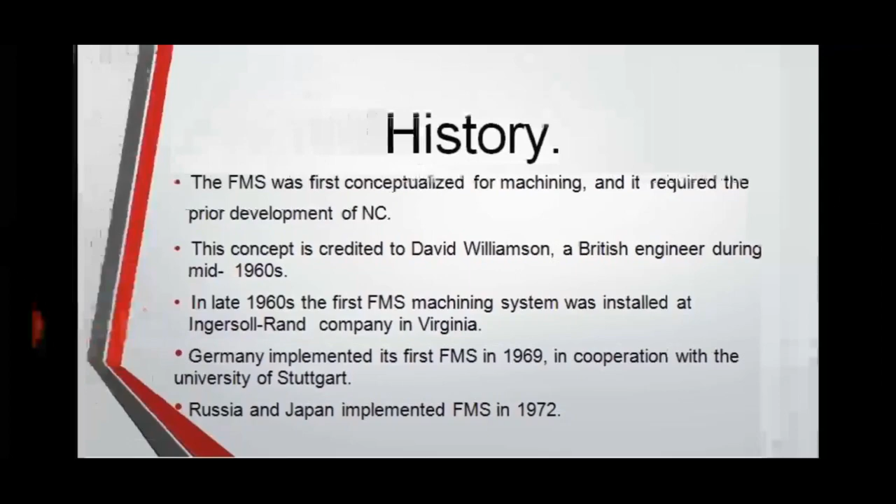So what is FMS? We know that in the current market there is change in the products frequently. The customer requirements are changing day by day, and also the designs which are made have to be changed frequently according to the convenience of the customers. So the products that are manufactured have to be changed frequently in order to compete in the current market.

So in order to change the design and also to change the manufacturing, we implemented this FMS, that is flexible manufacturing system. So in this flexible manufacturing system, there is an opportunity to change the design frequently and also to change the manufacturing operations, so that within less time we can manufacture a number of products,

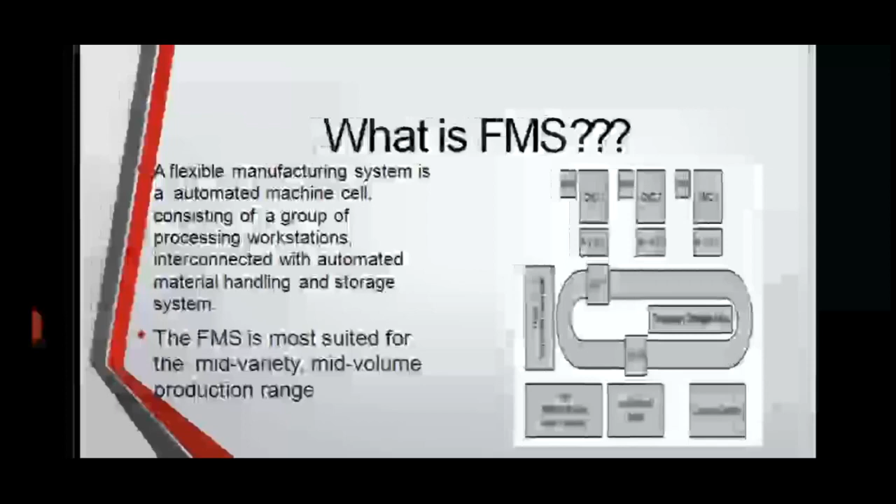So for this purpose, it is mostly suited in industries for producing medium volumes of products. So this is the reason why we are using this flexible manufacturing system. So why do you require this FMS?

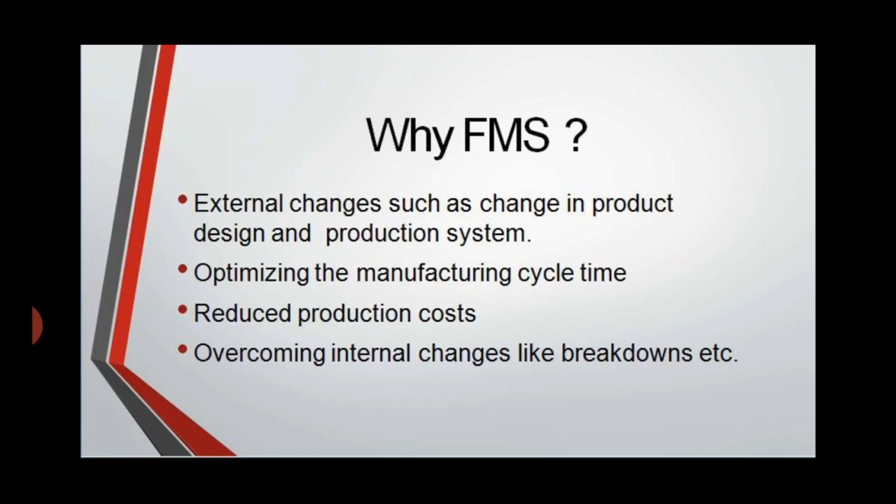The time delay will be very less because of fewer breakdowns in the machines. So this is the reason why we prefer this flexible manufacturing system. So how is this flexible manufacturing system going to make manufacturing industries more flexible? As you know, there are a number of capabilities in a manufacturing system.

So there must be these capabilities in the manufacturing system, because if the products need to be changed, then we are going to change the physical setup, stop the machine, and make n number of adjustments in the machines to make changes in the operations. So the ability to identify and distinguish among the different part styles processed by the system.

So in order to identify the different parts and part styles and to process them, the machines that are used must be flexible so that they can identify the different parts, and also in order to change the operation, to perform different operations and to change over the operations within less time, the machines must be more flexible,

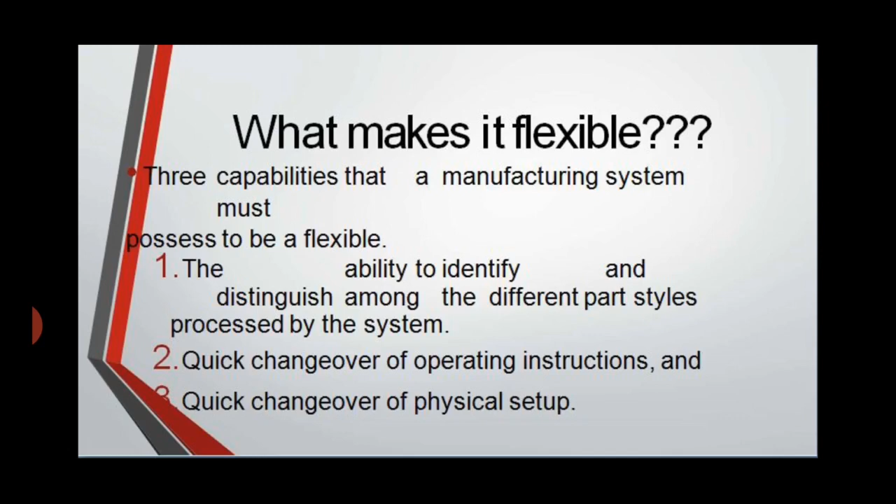So here, by using this flexible manufacturing system, we are able to do all these operations. We can change the physical setup within a short time, we can change the operations, and also we can change the designs, and also we can process a number of parts within less time. So it is more flexible to use in the industries.

So how is this FMS classified? These are the classifications of FMS. A flexible manufacturing system can be classified according to the number of machines in the system. If you take one system, it may consist of only a single CNC machine, or it may consist of n number of CNC machines, which we call workstations. That is, there may be either one workstation or n number of workstations, and depending upon that we classify these flexible manufacturing systems.

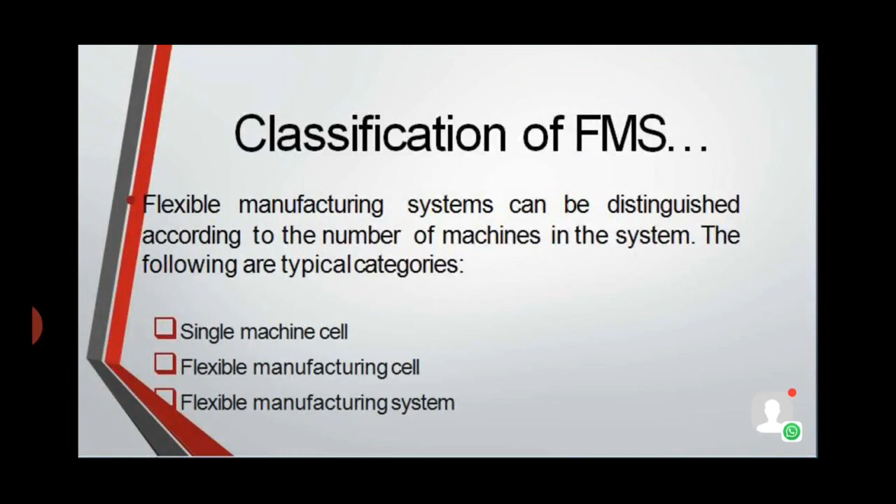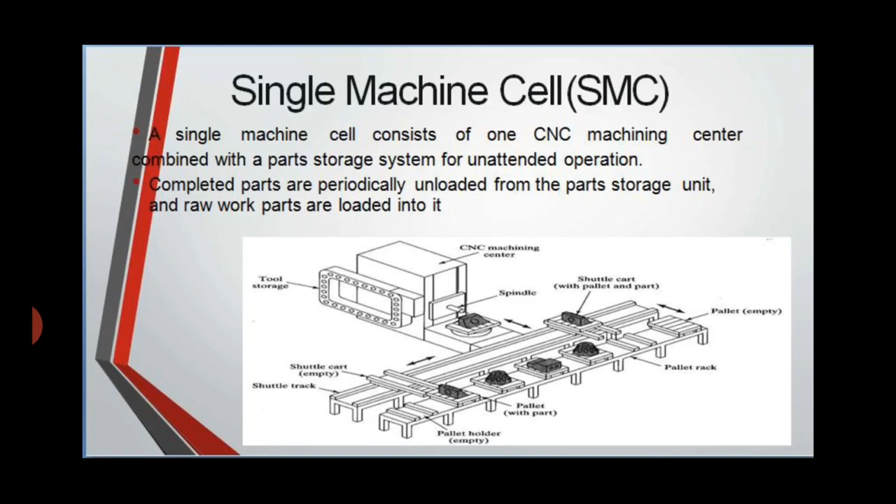So this single machine cell consists of only one machining center, and it is combined with a parts storage system for unattended operation. In this single machine cell, completed parts are periodically unloaded from the storage unit, and raw work parts are loaded onto it. Raw workpieces are fed and transferred to the machining center to perform the operations, and then they are transferred to the other cells. So depending upon the CNC machines used, we call it a single machine cell, where only a single machining center is used.

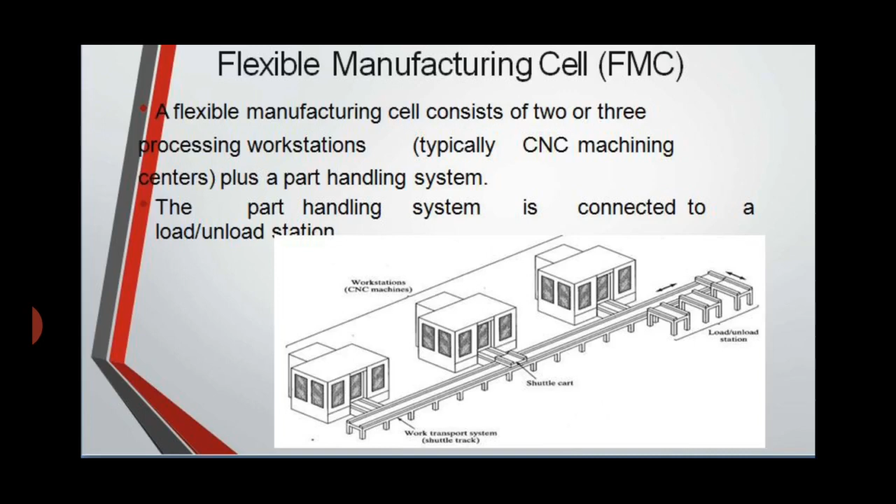And the final is the flexible manufacturing system. This flexible manufacturing system consists of 4 or more machining centers or workstations, which are connected mechanically by a common part handling system to perform the operations. There is only one common part handling system, which transfers the raw materials to the respective workstations, and these are electronically controlled by a distributed computer system.

This distributed computer system is where all the operations are controlled. If there are a number of workstations, for example 4 or more, then by using only one computer system, the distributed computer system, we can control all the operations being performed, and also control the automated material handling system in this particular manufacturing system.

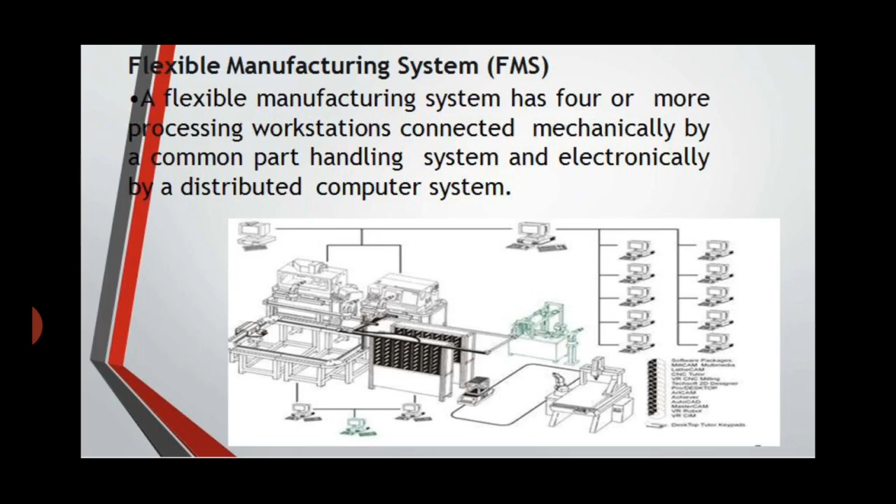The FMS has some basic components. First, workstations: in workstations we have a number of CNC machines, that is computer numerical control machines, which are used to perform machining operations on different part families. Depending upon the parts, we manufacture the components. It also consists of a storage system in order to transfer the raw materials and the finished products. And it also has a computer control system.

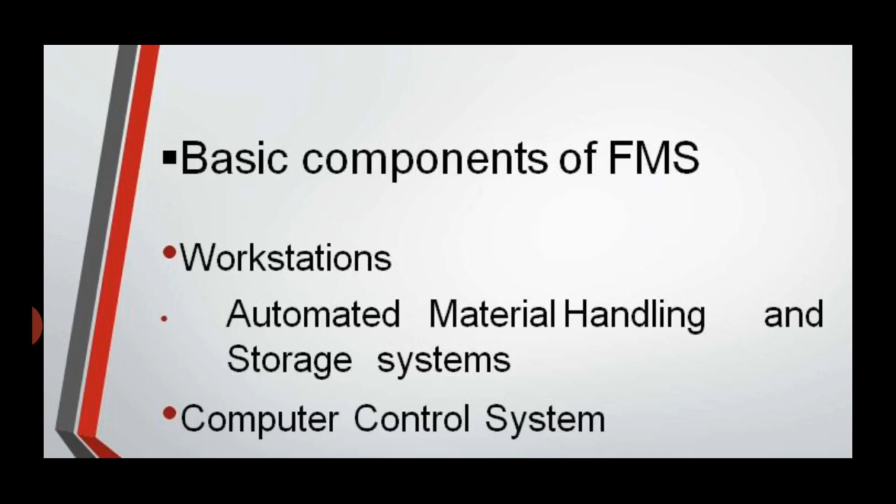So this is how the components of FMS are present in a flexible manufacturing system. When you come to the workstations, this particular workstation will be having a computer numerical control system, that is, in order to make machining operations, it has a number of CNC machines which work according to the part families,

and it contains a number of substations, that is loading and unloading stations, and it also consists of machining stations and a number of assembly workstations, where after the operation is performed, in order to assemble the products, you will have the assembly workstations, and also other processing stations like inspection, where after making the number of operations, we have to inspect in a particular workstation. So for that there are inspection stations where we perform the inspection on the finished parts.

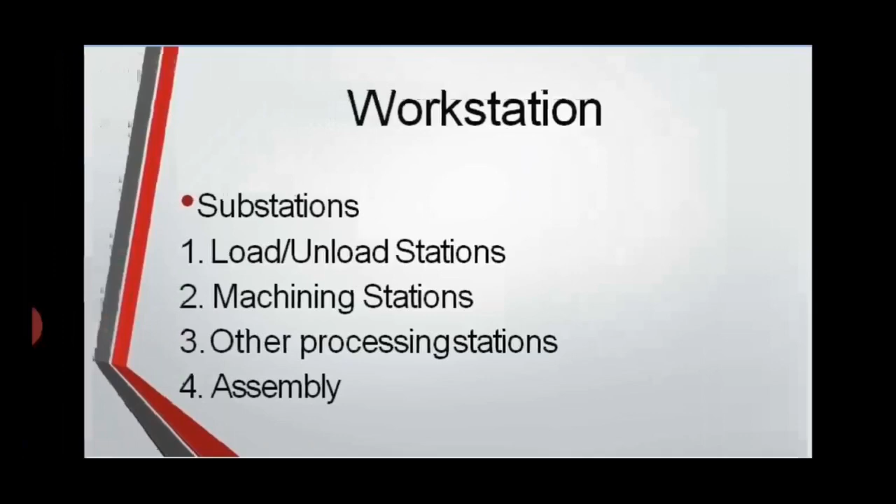So this is how the workstations carry out the work. It is going to make n number of operations here, whether it may be loading or unloading, or after loading it is going to make the machining operations, and after the respective machining operation is done, it is finally inspected, and then it is assembled here.

This particular unit is going to control the traffic, the material handling system, and also the monitoring of all the work parts being processed here. It is controlled with the help of this control system. So these are the components of FMS: first is workstations, and second is the computer control system. By this we are able to control and make a number of operations here.

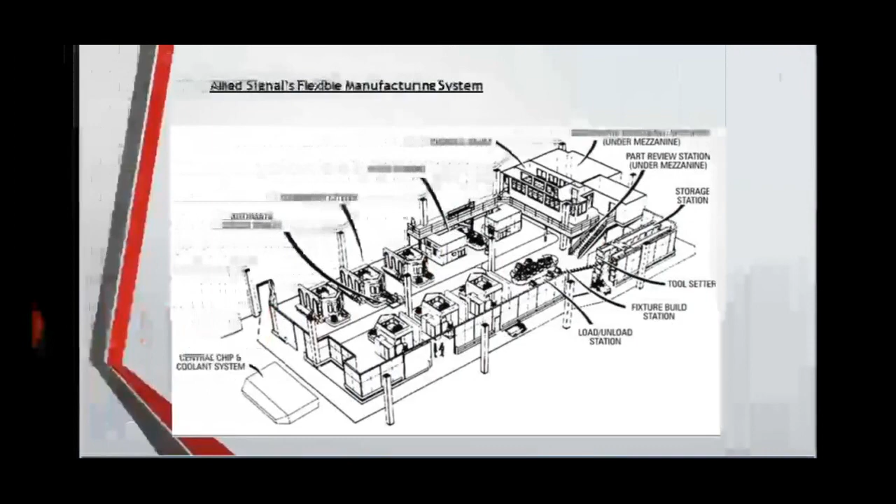At the same time we have the human resources. In order to look after all these operations, to control them and check whether they are being performed, like whether the raw work parts are being loaded into the system or not, and whether the tools are being changed or not, and also to maintain and repair the system, we need a human resource department where a number of skilled persons look after the system and perform the overall management of this particular system.

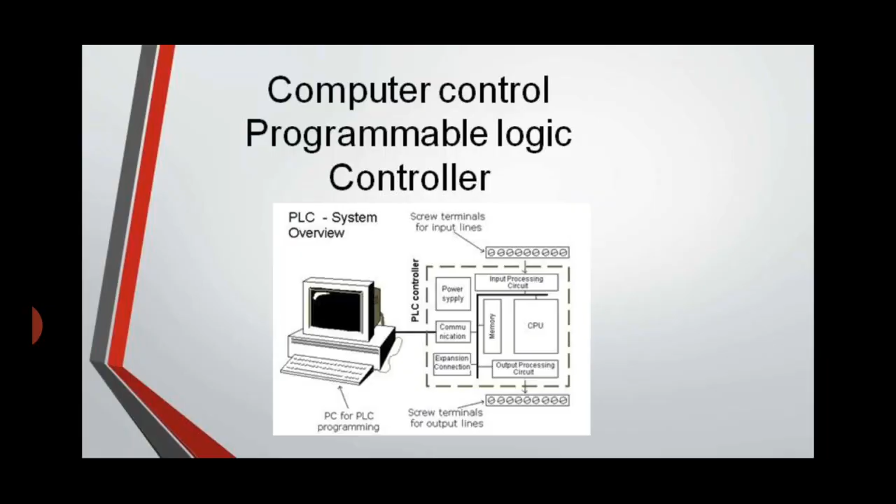So this is the flexible manufacturing system where we have machining centers and an automated guided vehicle where the workpieces are transferred to the respective workstations, and we have the control room to control all the activities, and the loading and unloading station where the workpieces are loaded, and after the required operations, the workpieces are unloaded. So this is how the flexible manufacturing system is used in industries.

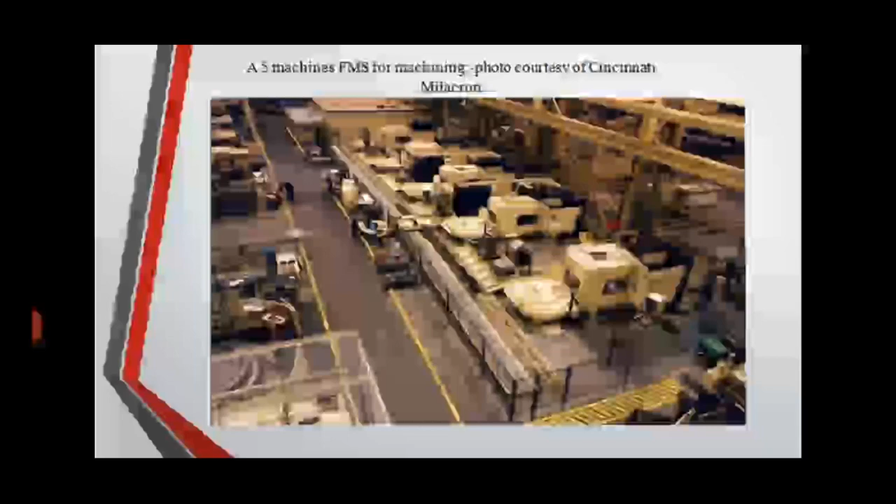And here you can also observe the 3D view of this flexible manufacturing system, where you can see the flow line and the number of workstations. And as I said, human resources are required to maintain this particular FMS. That is, humans are needed to manage the operations of the FMS.

There are a number of functions typically performed by humans, which include loading raw work parts into the system and unloading the finished parts from the system, changing and setting the tools, and maintaining and repairing the equipment. So these are the functions performed by humans. Although this FMS is automated, with operations and control systems being used here, apart from that you must have human resources to perform particular functions.

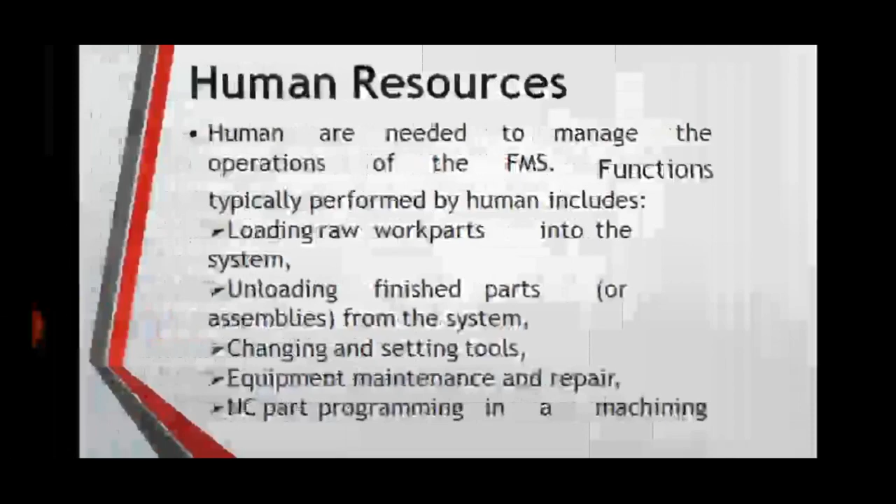So as I said, the flow lines. The FMS has a number of flow lines, which are called layouts. Depending upon the space area and the number of operations, if the part has to be transferred to a number of workstations, then depending upon that we are going to use the layouts. There are a number of layouts in an FMS. The first one is progressive or line type.

In the previous figures we can see the flow lines here, which are of a line type. So there are line type layouts, or loop type, or ladder type layouts, and open field type and robot centered type. This is how the FMS layouts are classified. Depending upon the number of operations, we use a respective layout in a particular manufacturing industry, whether it may be line type, loop type, ladder type, open field type, or robot centered type.